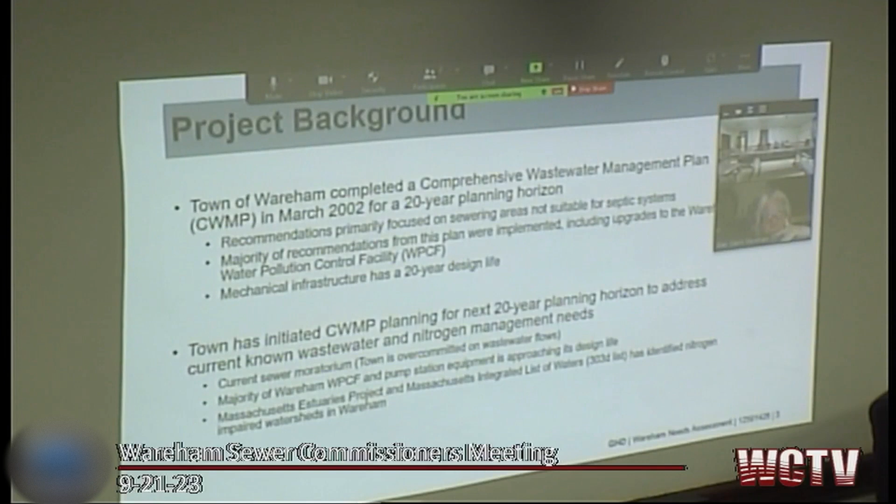We're also looking at additional needs for the town that have come up in the next 20 years, and to address the current sewer moratorium, as well as the findings of the Massachusetts Estuaries Project and the waters listed on the 303D, or integrated list of waters, which shows nitrogen impaired waters.

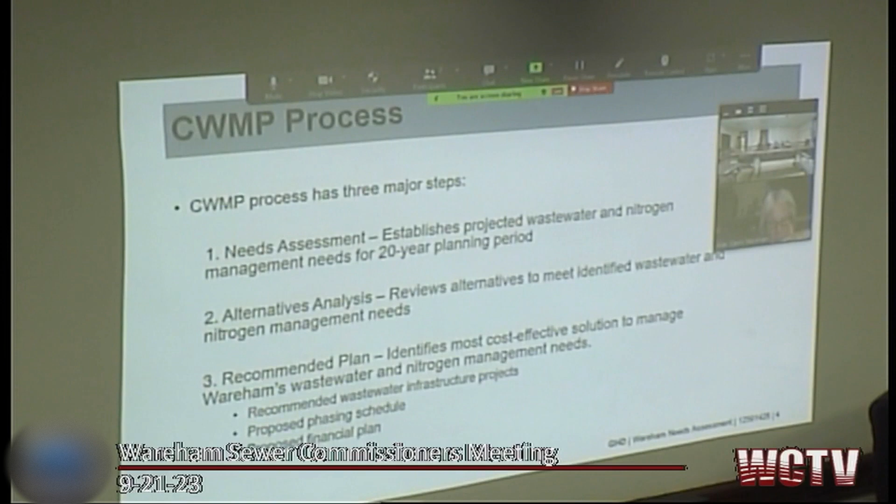Overall, the CWMP process has 3 major steps. The first is the needs assessment, where we work with the town to look at the projected wastewater and nitrogen management needs for the 20-year planning period. For this project, we're looking at 2025 to 2045.

The next step is the alternatives analysis, where we look at what different alternatives can be used to meet those identified needs. Those will be screened and costed out to identify the most cost-effective solution, which will become a recommended plan. That plan will include the recommended wastewater infrastructure projects to be implemented over the next 20 years, the proposed phasing schedule, and the proposed financial plan for those projects.

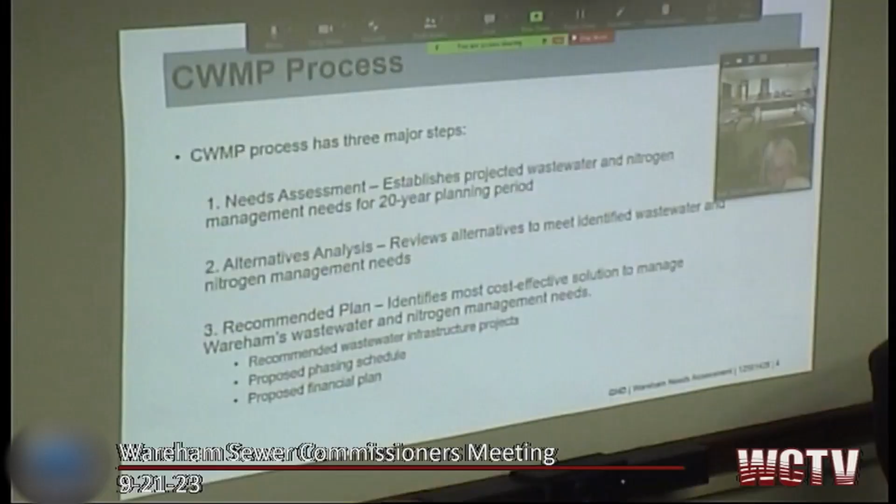As I go through this presentation, if anybody has questions, please feel free to ask them as we go through instead of waiting for the end.

As we've been working through the needs assessment, we've been meeting with the CWMP advisory group, composed of different representatives of Wareham offices, boards, and committees, to get their input to establish the needs. We'll continue to work with them through the CWMP process.

The first step of our project is to establish the wastewater flows for the 20-year planning horizon. When we look at these flow projections, we're looking to meet needs: we need to continue to treat the existing centralized wastewater flows going to the existing facility, and accommodate flows that have been committed by the town to go to that facility.

Then we need to look at environmental needs: how much nitrogen needs to be taken out of the watershed, converted from septic to sewer, in order to meet the town's draft TMDL.

We want to make sure we're looking to the end of our 20-year projection, so we're looking at the anticipated population for the planning period, and we also need to meet the town's housing needs, identified economic needs, and identified public health needs.

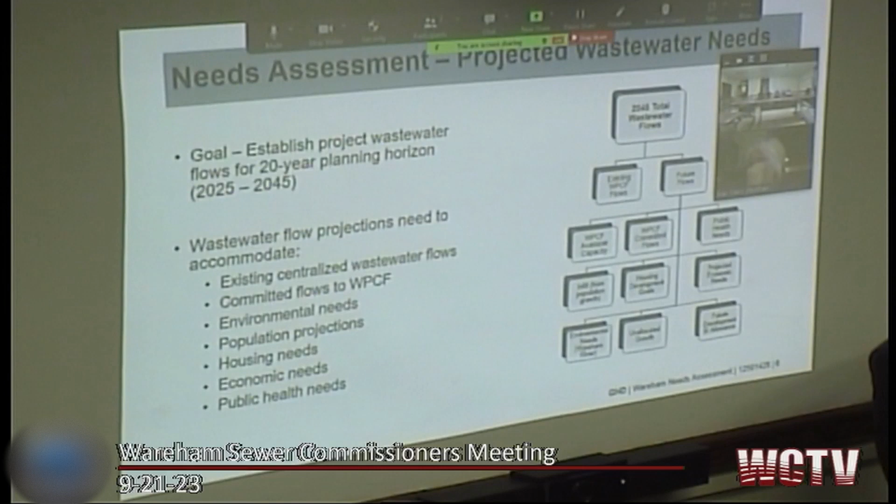In order to establish the existing flow, we worked with influent flow data, and also worked with the town to identify what flows have already been committed to come to the plant. Those are included as allowances in our flow estimates.

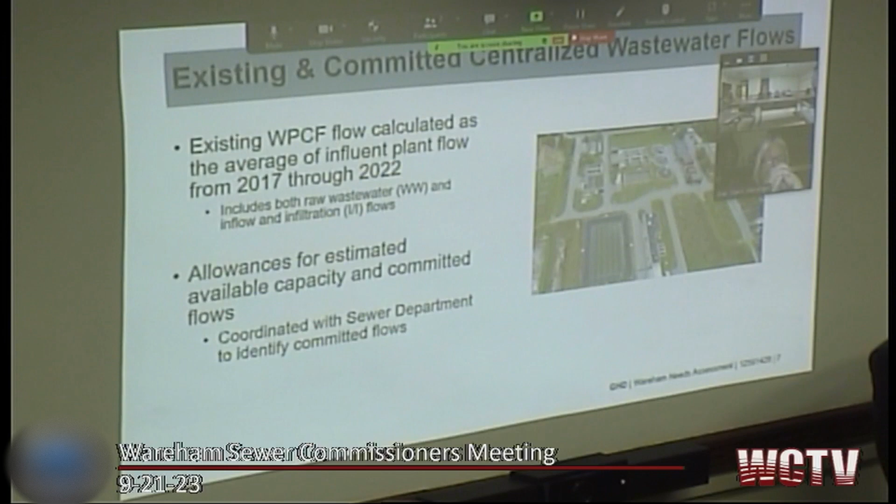In terms of environmental needs, there are multiple studies showing that excessive nitrogen to Wareham waters are causing coastal water degradation.

You say that the primary nitrogen source is septic systems, not necessarily the plant? No, septic systems - the Massachusetts Estuaries Project shows there is the treatment facility, so there is load coming from that also, but the larger source is septic. When we come up with our plan, we account for the fact that there is effluent nitrogen coming out of the plant.

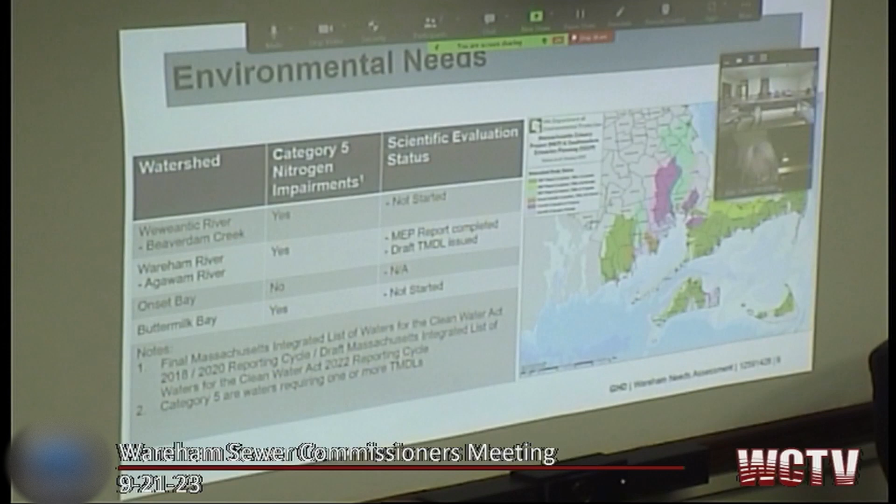When we look at the environmental needs as part of the CWMP, we base our analysis as a starting point on the data used to develop the MEP report, which looks at the watershed on a whole basis. We start with that data and then isolate the estimated load coming out of Wareham, so when we're looking at our plan, we're looking to control Wareham's portion to meet the TMDL, not the whole watershed.

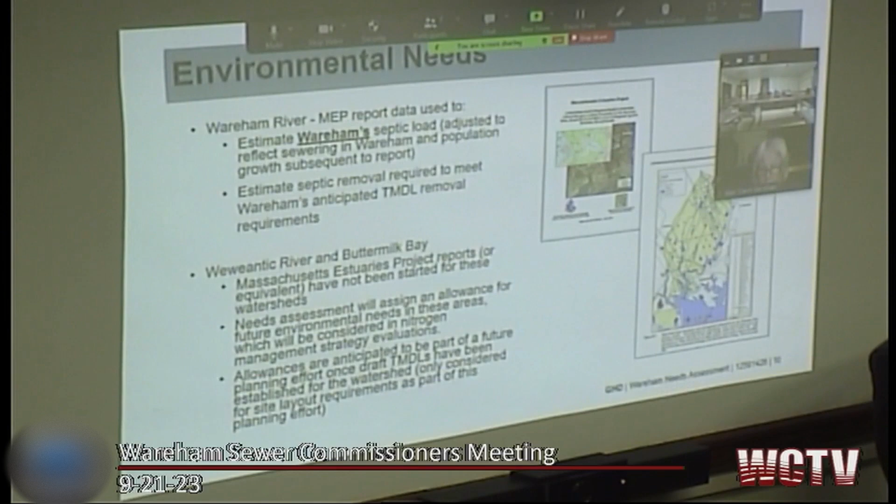If I could add, when we talked about this a month ago at one of the sewer commission meetings, that was a question that came up - you're not responsible for Plymouth's load or Carver's load that might be in that watershed, you're only responsible for what's coming out in Wareham. Which is why I asked the question I did about where they're testing, because I want to test before the outfall pipe, upriver.

The other adjustment that's made is that the MEP report was done before a lot of the sewering in Wareham was implemented, so we adjusted for that septic to sewer conversion. We're taking that out of the septic load projected to go to the river. We also looked at population growth subsequent to the work, so we added population growth and took out septic load that's already been removed by the sewer system, to adjust it to reflect today's conditions.

That's how we come up with the septic removal required to meet Wareham's load. Then we look at the projections for the 20-year planning period to get to 2045. Does that make sense, or does anybody have questions on how we adjusted the septic loads?

So the original report is from 2014, is that right? Yes, but the data is older. And the data's old, okay. So we used the old data but updated it. Well, that's the point of this.

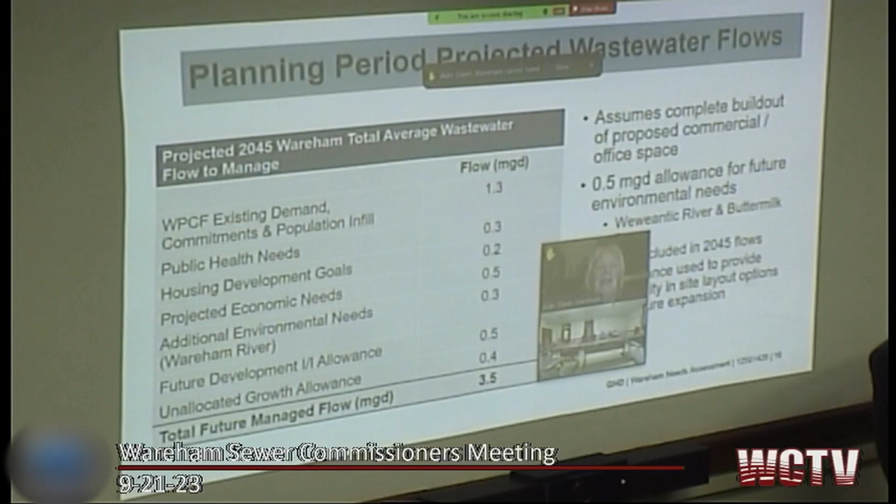It's definitely been a variable. Okay, can you go back a couple slides to where you were looking at, I thought I saw 120? Yes, right there. Where we have an average 120 gallons per single-family dwelling, I think that's wicked low, when we're looking at probably 220 as our standard when we calculate a 1 EDU for a household. Am I missing something?

Well, that's 2.4 people per unit. In a single-family home, you're putting 2.5 people, the way they have their numbers figured out. So if you look at it that way, it's about 50 gallons per person. When it's indicated average GPD per unit, that's not per individual, that's per house and structure. But the single-family dwelling is 2.5 people, so it should be upwards around over 200 versus the 120.

The 120 gallons per day is based on Wareham water use data, and it's also consistent with the water use that was used in the Massachusetts Estuaries Project, so we did check it two ways. We arbitrarily, as an EDU, counted it as so many gallons, and I think that's where the confusion is coming from. So you're actually using the data from the water department, yes, which we wanted, good, okay. I agree, all right, perfect.

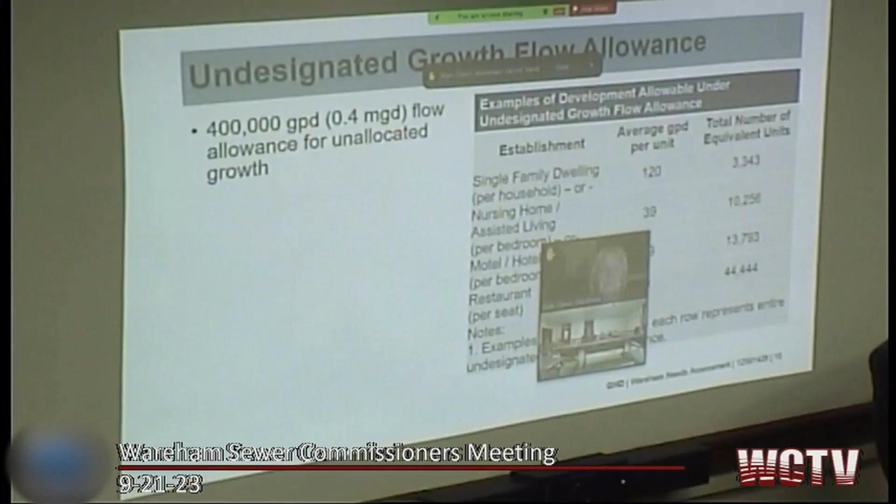And Sandy, did you still have your hand up, or is that perfect?

So the next step of the analysis, which we're currently working on, is to develop the alternatives that can be used to meet the wastewater needs that we just talked about. In terms of wastewater treatment, we're looking at 3 different alternatives: treatment and expansion at the existing wastewater treatment facility, either to treat a portion or all of the needs; opportunities for a remote treatment facility; and opportunities for a regional solution.

For effluent discharge, we're looking at whether there are opportunities to increase the capacity at the plant's existing outfall, which would be a surface water discharge. We're also looking at opportunities for new discharge to groundwater, and the ocean outfall. And for the collection system, we're looking at what are the most cost-effective areas for the proposed sewer extensions.

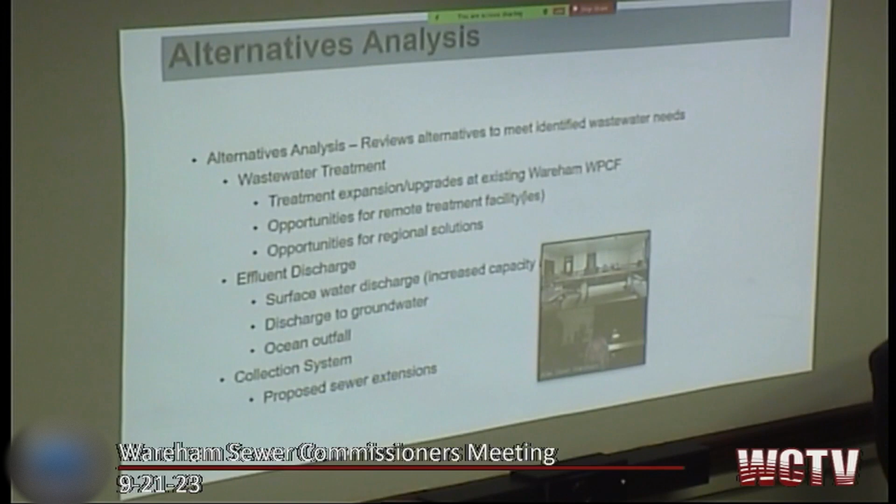For the purposes of the alternatives analysis, we're looking at the town in 2 different study areas: south of Route 495 and north of 495. Our preliminary analysis at this point is showing that about 2.5 to 3 million gallons per day will likely go to the existing plants.

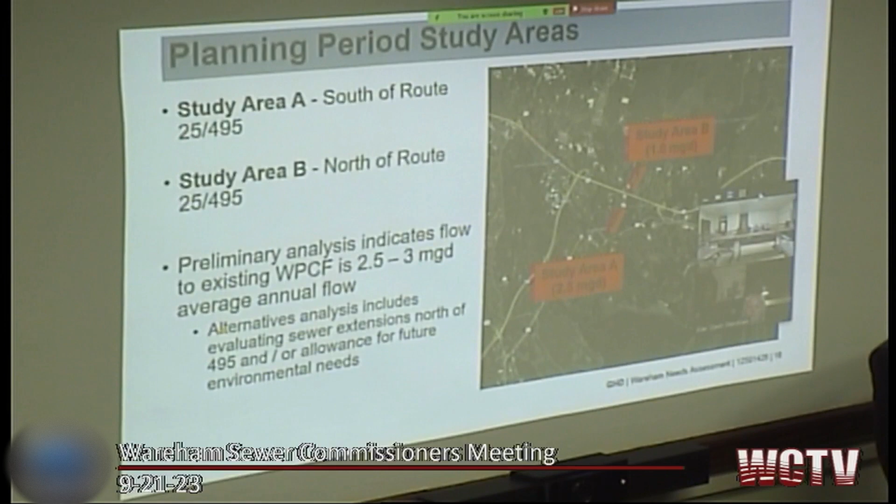So one of the options we're looking at is what would the layout be at the plant if all of the flow was brought to the existing plants. We're looking at it in million gallon per day increments.

Can I speak to this? Yeah, a little bit more? So I'll just point out a couple of things here.

So the different colors show the different phases. What we're looking at is potentially increasing the flow at this facility in increments. Right now you can treat 1.5 MGD. We could go up to 2 MGD in one step, 3 MGD in another step, and 4 MGD in a final step, building in flexibility as you look for other opportunities to manage wastewater flow.

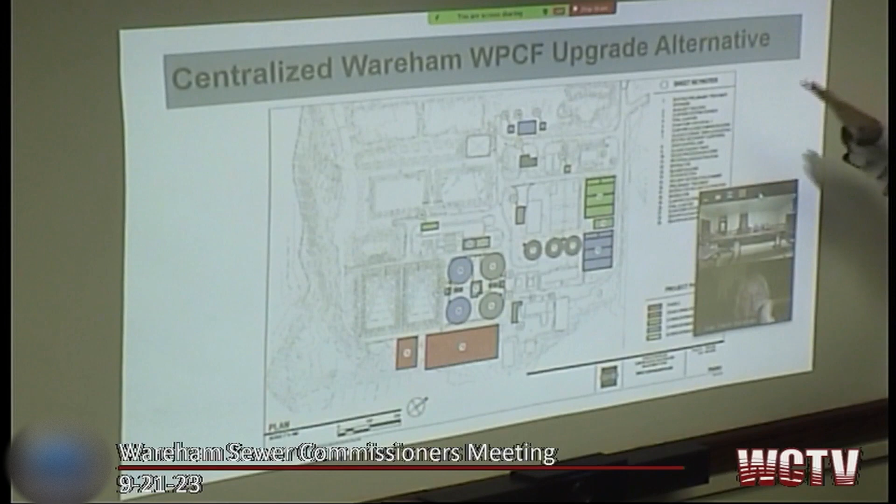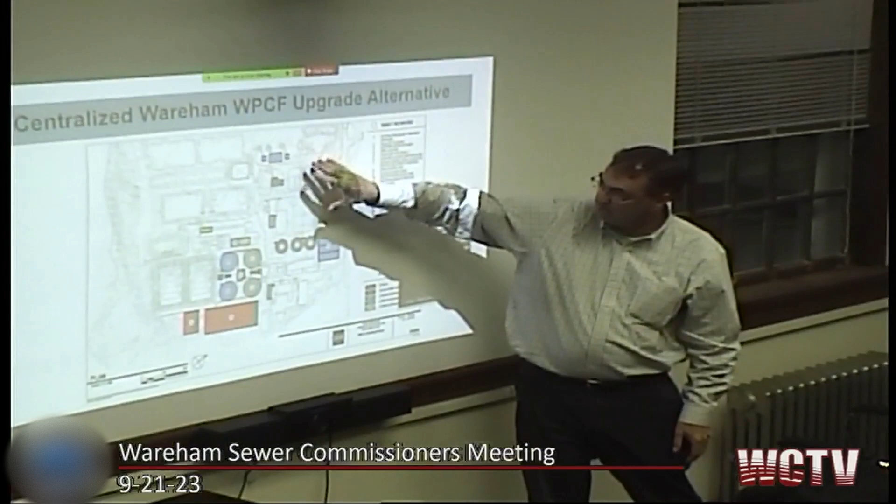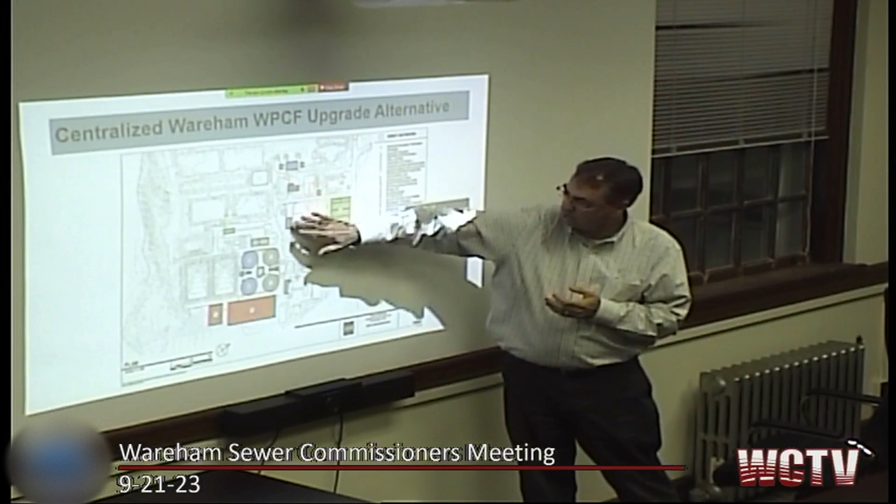If it all had to come here, this is what you could be looking at with increased facilities using all of these colors. We're not here to talk about the warrant article for the design upgrades at the plant that's underway now, but the gray boxes show work that's under design right now, and you can see how it fits into the future plan as part of the ultimate plan. I just wanted to show that it's a phased upgrade we're looking at.

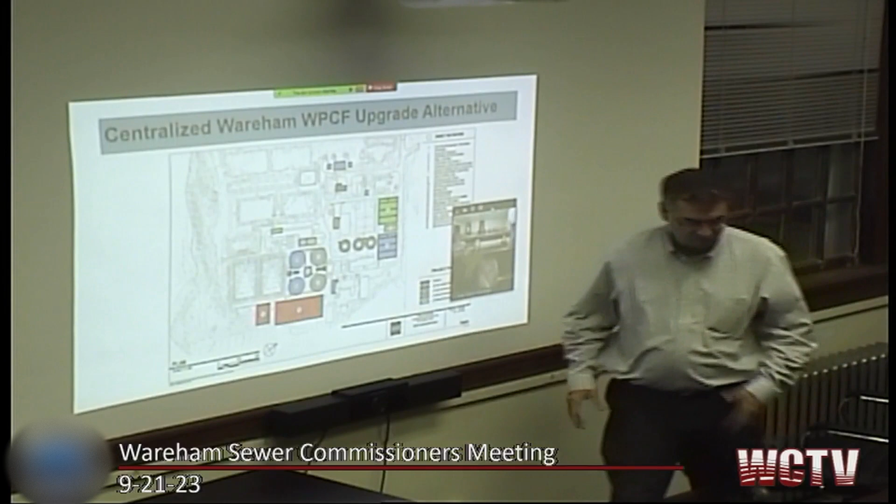And we have the geography to handle the build-out, yes, to accommodate the maximum as we go. And all of the facilities that exist now would either be reused in their current capacity or would find a different use for them. So there's a use for everything.

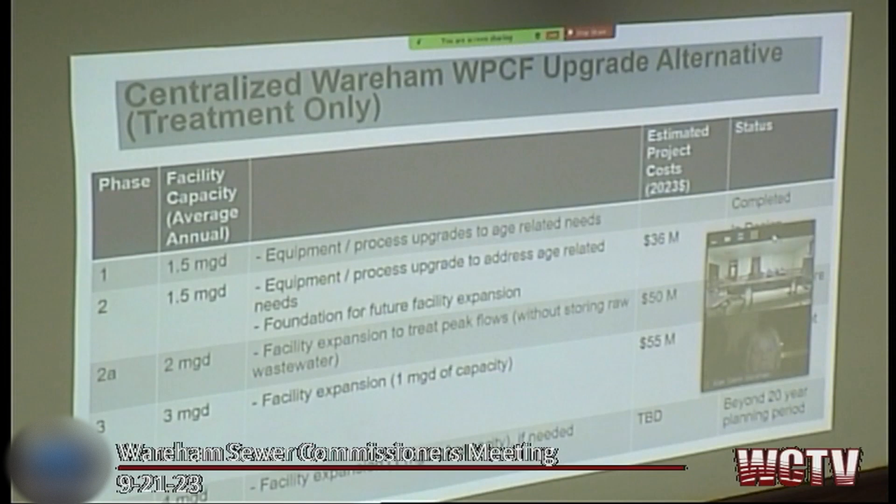So phase 2 is really a foundation as the plan continues to expand. Mark had mentioned the preliminary phasing. Phase 1 has already been completed, addressing wastewater needs due to age. Phase 2, currently in design and the subject of the warrant article, will also address age-related needs and will be the foundation for future facility expansion.

Then there's a proposed expansion to 2 million gallons per day, 3 million gallons per day, and 4 million gallons per day. In the next column, we have planning level cost estimates for each of the phases. This is the work at the treatment plant itself. There will be additional projects needed for discharge, solids handling, and the collection system, and the costs for all of those are currently in development.

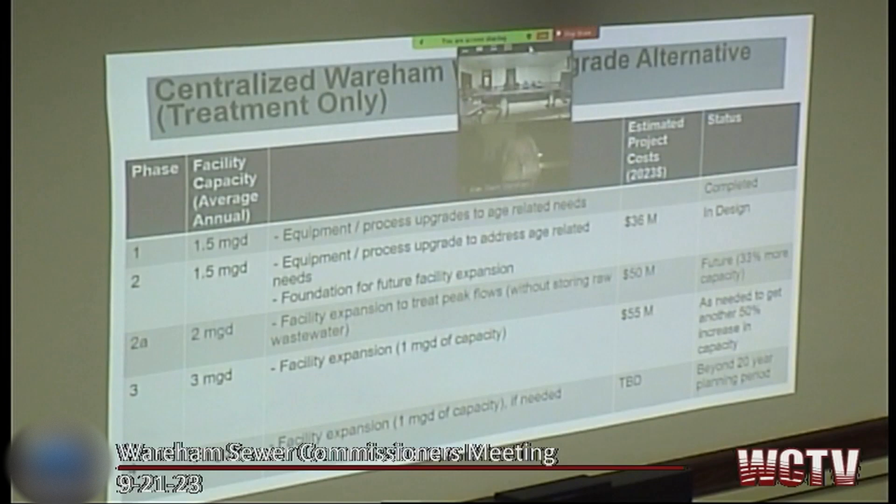Mark, on the 2 million gallons a day, in the parentheses there, you say without storing raw wastewater. Is there a chance that if we had a slow period, we could treat more? You would still be able to use those lagoons, they're still going to remain and could be used, but you wouldn't have to use them. Does that make sense?

You're wondering if you could use them to increase the capacity of the facility? If we stored raw sewage, is there a time when the plant is running at a lower capacity that we could then process it and still not go past our outfall limits? So you could continue to use the same concept, right, you would shave your peaks with the EQ basins.

You could, but we're trying to reduce the reliance on that, and I'll tell you why - it's really a wild card, because if you get high flows, you've pushed the limits of those lagoons in the past, and as the town grows, it's not a good idea to use it as a standard practice, because if we get a heavy rainy season, we're in trouble. As the town grows, you're going to need more and more of those to accommodate flows, and that's why we're trying to transition you to become what's called a flow-through facility, so you don't have to rely on storing raw wastewater.

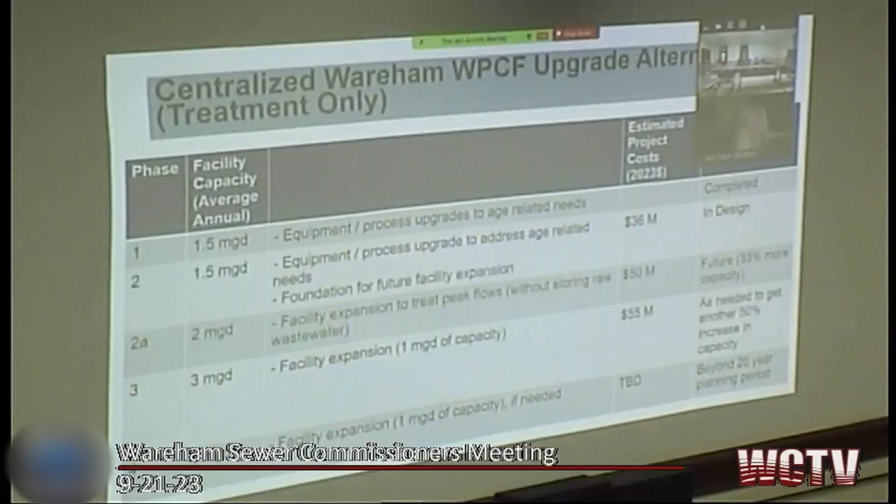So, these are the additional components that cost estimates are in development for. Can you go back - just want to make sure, we showed costs for the treatment plant, but there are other costs that are not insignificant.

The plant's going to have to have additional solids handling capacity - that's been a struggle for the facility because of issues in New England with disposing of sludge that you've been hearing about lately. Effluent discharge, whether that's to groundwater or to an outfall, that's going to be a cost. And then sewer extensions and upgrades within the system that are just required over time.

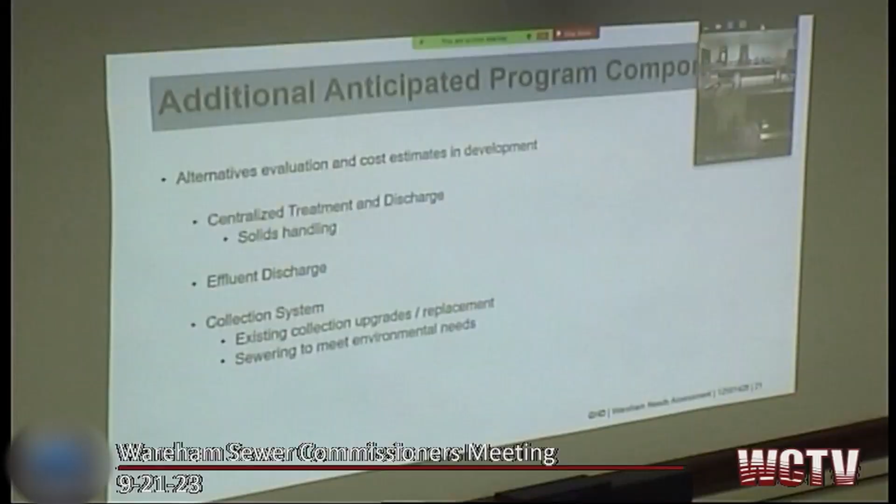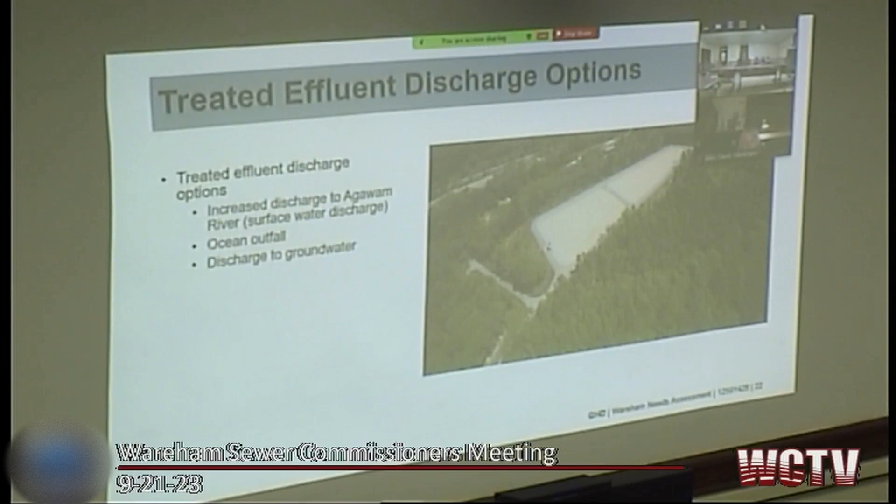I wanted to give an overview of the three different discharge options we're looking at. The first is increased discharge at the existing facility to the Agawam River. Second is ocean outfall, and then discharge to groundwater.

As part of this project, we've had an initial meeting with DEP and EPA. The permitted capacity that can go to the Agawam River now is 1.56. So the conversation is what would be needed to increase that capacity. In order to do that, we would need an approved TMDL compliance plan showing that we can offset the additional nitrogen to the Agawam River as part of our overall wastewater management plan, which is being developed as part of this project, to show that with increased discharge, we can still meet our TMDL.

As we look at our different options, there's some opportunity to offset the increased flow by reducing the effluent nitrogen concentration. The facility currently has a permit level of 4 milligrams per liter that can go down to 3, which will shave off the nitrogen coming out, but it'll also require sewer offsets. As part of the permitting, we'll also need to do an anti-degradation analysis, which looks at the environmental conditions in the river to make sure it can sustain the additional nitrogen from the increased flow. Then we'd go through a permit application with both Mass DEP and EPA for the increase, which may trigger the Interbasin Transfer Act.

This is something we see as an avenue to potentially get to 2 MGD. That's why we were looking at different stages — this is a potential avenue to increase the flow to 2 MGD.

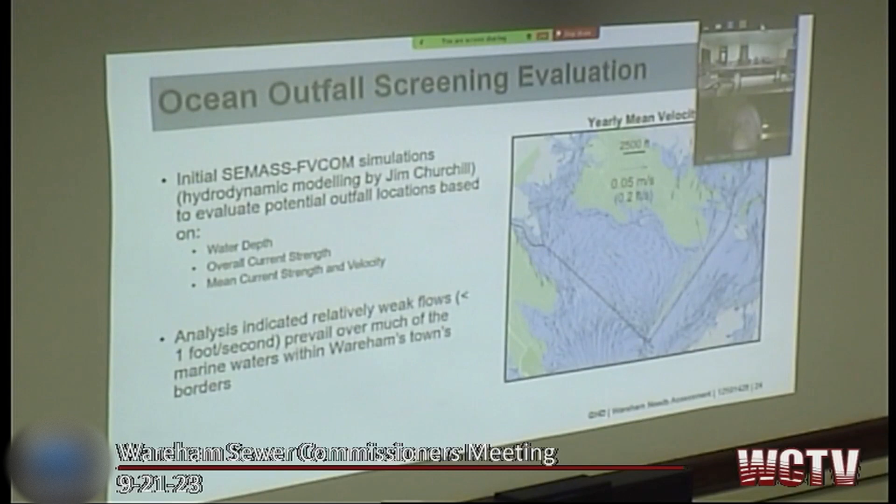For the ocean outfall, we worked with Jim Churchill, a WHOI scientist, to look at hydrodynamic modeling. We looked at the entire town of Wareham and did an initial screening based on a couple of key parameters to find areas suitable for a potential ocean outfall — areas that are deep enough and have a strong enough current. Overall, the analysis showed that outside of the canal, there's relatively weak flow and it's relatively shallow. So really the most practical location for an ocean outfall would be at the canal, as shown a little better in the graphic to the right.

Not every place in the canal is as advantageous as another. Just getting to the canal doesn't necessarily solve the problem - we have to get to it in a certain location. And Mass Maritime is what you've found is the best.

The other driver that comes into play is cost - where is it most cost-effective to enter the canal? Mass Maritime is a very cost-effective solution. That's why if we stayed in Wareham and didn't have to deal with any other town and went out to Great Neck, it would all be in Wareham, all of the piping.

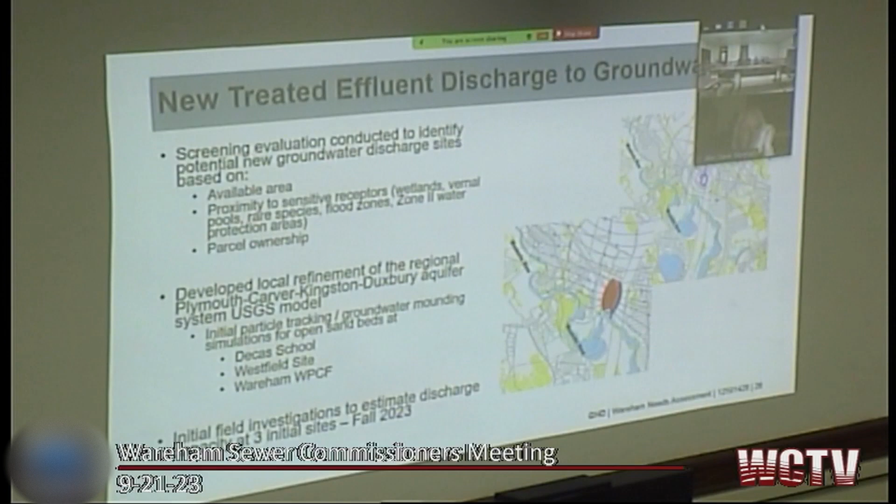We're also doing field investigations to look at the soil conditions to see if they're conducive for discharge, and those are happening this fall, starting next week.

In our last meeting, it was mentioned that the property up behind the maintenance garage - I'm working with David Menard to see if we can also do the testing at that property.

Now with those, if we went to a groundwater discharge, would it be limited - would we have to get to the canal within 20 years? That study they did on the Cape makes it sound like groundwater discharge is not going to be acceptable within 20 years. What's the study you're referencing?

What was that report we read that showed all of the Cape had to be sewered, that they had to get away from septic systems? I don't recall the study, Peter. I think that's phase one of this TMDL.

It's looking at, after it's been sewered, this is a way to recharge the treated effluent. So it's a practice that's very common on the Cape. Do you know what kind of discharge you're referring to? I think it was - the Cape is phase one of the TMDL.

Title V regs, okay. Were they getting away totally from groundwater or just untreated septic systems? They're getting away from septic systems. So once you treat it at a wastewater treatment facility, then it could be discharged back into groundwater - then it can be a groundwater discharge. All right, thank you.

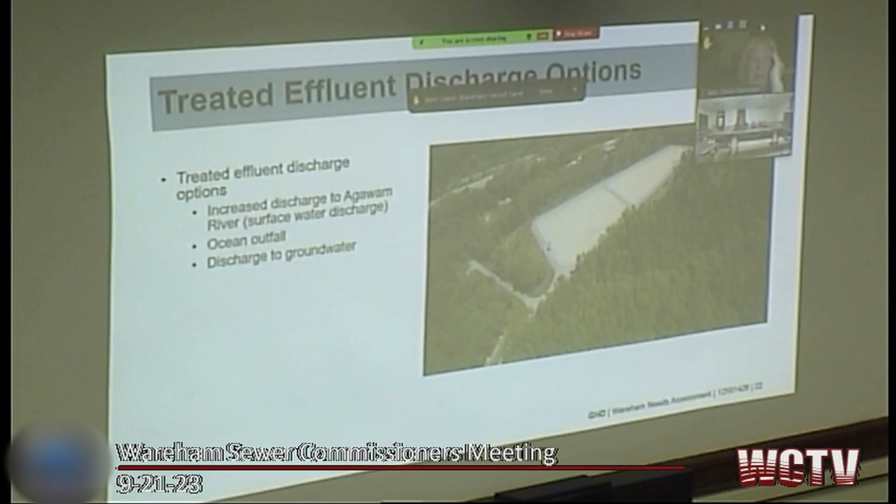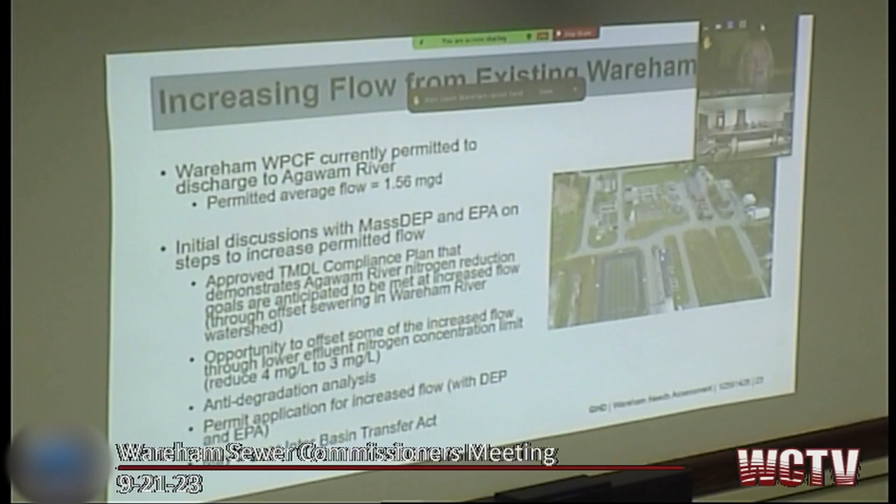The next screen talked about possible sites for a ground discharge, and you included the pollution facility as one of them. I thought we were too close to the river to do a ground discharge in that area, since we considered doing something within the forest where the police facility could have been put. The land between the school and the Agawam River was deemed too close to the river to be a discharge point, so I was surprised to see the WPCF on this list as a possibility.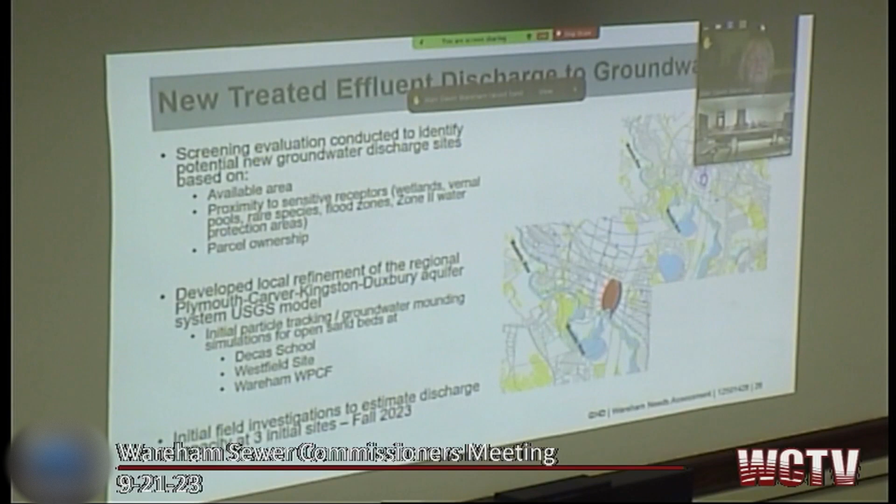At this point, we're looking at the area that's outside of the 100-year flood and sensitive wetlands, and we're doing the initial investigations to see if the soils are suitable. Then through particle tracking, we'll be able to assess the environmental impact.

So we have eliminated the Minot Forest area by the school. Is that correct? Yes. Oh, thank you.

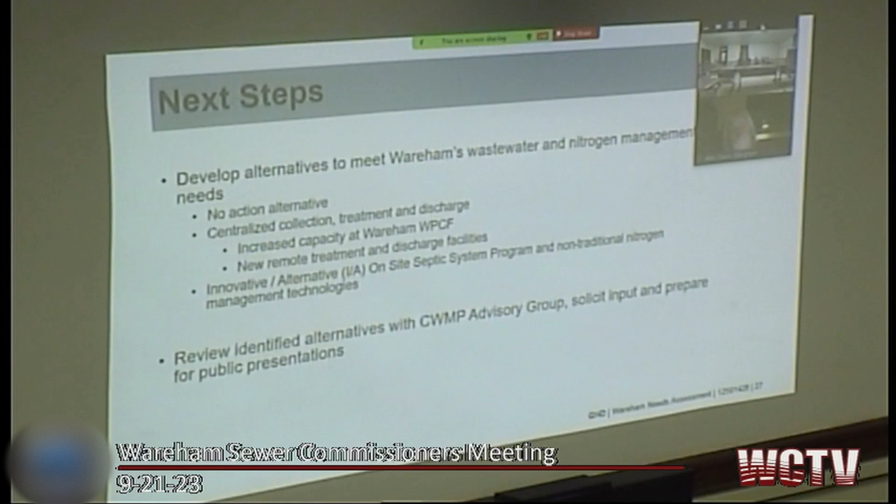So this is the last slide, just summarizing next steps. We'll continue to develop the alternatives analysis, which will include a no action alternative, so if nothing was done, and then look at alternatives for centralized collection, treatment, and discharge. We'll also look at opportunities for non-traditional technologies or an innovative and alternative onsite septic system program, so are there areas where you could have on-site systems instead of centralized, which would be a more cost-effective alternative.

We'll continue to review our findings with the CWMP advisory group, solicit comment, and then prepare them for public presentation and discussion as we move through the project.

I know we've talked through a lot of questions as we've been going through the presentation, but I wanted to see if there were any other questions or comments at this point. Any questions or comments from our audience? I do. Just identify yourself, please.

My name's Betty Jean Leopold, and I live on 12 Linwood Ave. I live behind the sewer treatment plant, and it stinks like hell. And somebody put a big box near the pumping station, and nobody's telling me what that box is for. Are they gonna make it bigger?

And a guy wants to make an access road. Excuse me, those are way out beyond what we're discussing here this evening. You just asked me what my question was, I gave it to you. That's why I'm here. Okay, thank you. So hopefully I get an answer tonight. We're not prepared to do that here, however, feel free to email me and I'll get an answer for you. It's addressed to Wareham Commissioners at wareham.ma.us. I'll certainly answer your question.